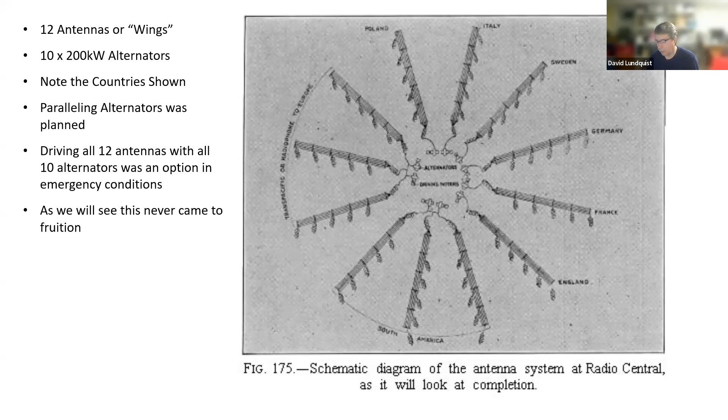So it's important to note, if you said who created what's at Rocky Point, it's really this guy, Ernst Frederick Werner Alexanderson. He's the guy who was chiefly responsible for the technology, how this was all put together at Rocky Point. This included the alternators, and by way of explaining, this was pre-large vacuum tube transmitters.

This wasn't spark gap. This was all AC alternator based, just a much higher frequency version of what generates our electrical power today, or the voltage in your car. But instead of 60 hertz or 120 hertz or 50 hertz, it was around 18 kilohertz. A very, very low frequency, just barely above the audible range. You'll see later in some of the logbooks, all the stuff was sub 20 kilohertz.

He holds several key patents on the technology. Guys like Tesla get a lot of credit for what they did. Alexanderson, if you look at total number of patents, is not far behind Tesla. And he was continuing to generate intellectual property up until the 60s. He did a lot of patenting on television, aircraft navigation systems, you name it. He's an extremely prolific inventor. As impressive as what he did at Rocky Point was, he was really just getting started during this era.

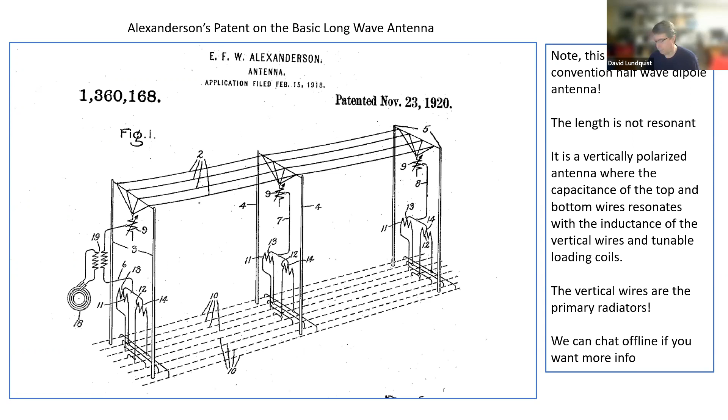Okay. All right, again, what I've got put together here was really more for a historical group. So there's some pretty heavy picture content. We'll go through some of the stuff. It's certainly of interest, and maybe there's technical elements as we go through.

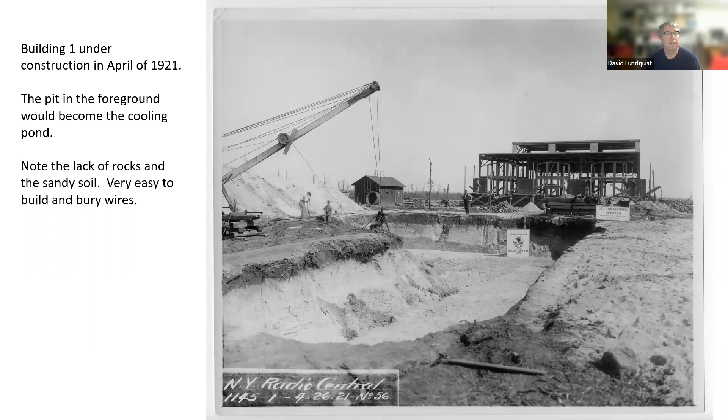This is shortly thereafter; they put dates on everything. You'll notice this is August 12th, '21. So the place was open 3 months later. So they got a lot of work done quickly. It's not the neatest construction site I've ever seen. There's a fair amount of stuff laying here. But even the cooling pond, you can see they did in sections. It got wider as time went on.

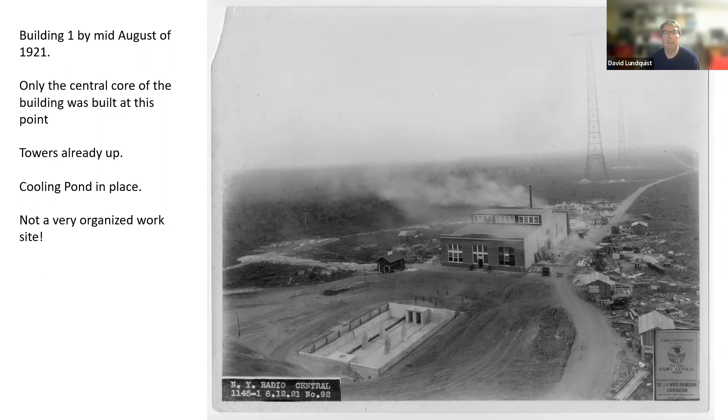But you can already see they've got some of the main towers up in the background. And again, there was a row out the back of the building. And this picture was taken from the first tower that led on the antenna wing out the front of the building. And in fact, the tower that this was taken from was the last one that came down in the 70s. So that one was up for a long time.

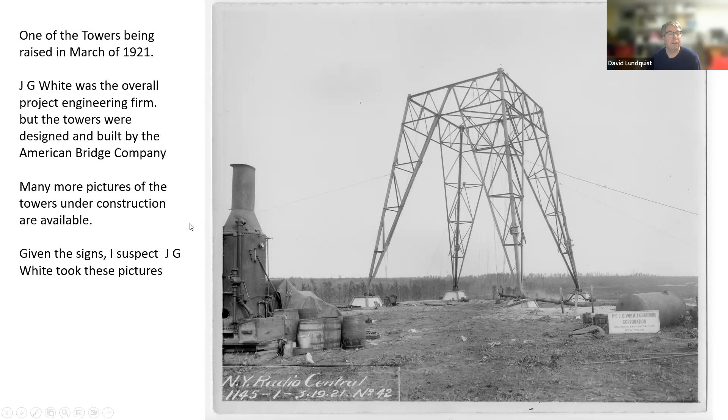This gives you some idea of the construction effort involved. The company that put up the towers, I think, was actually called the American Bridge Company. So this is what these guys did for a living. As you notice, he's got a real serious hard hat there going on, and there's little or no safety gear, no harnesses, no nothing. But not aware of any unfortunate incidents on site, but who knows?

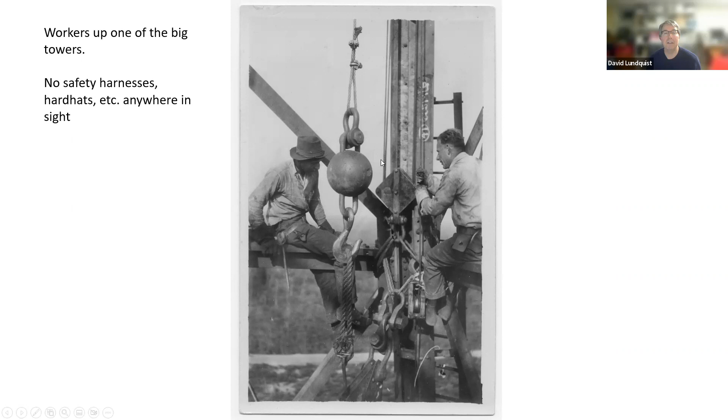This is interesting, and I think there's some more pictures of this. This is actually part of a gin pole, if you will, that they used to bring up pieces of the tower. They would anchor this at different levels and use cables and use it almost as a crane to lift up sections of the tower. And as I said, keep in mind the photographer had to get up here too.

I mentioned there's a lot of copper that went into the ground. From what I can see, given the structure of the antennas, for every piece of copper that was up in the air, there was a complementary piece of copper in the ground. And very likely all of it's still there. I don't know how deep they buried it. There was a piece of equipment I think I've got a picture of, which shows a pullable device, 4 wheels, pulled by a tractor, that cut what looks like about a 12-inch deep furrow in the ground and dropped the wire in. I guess copper wasn't terribly expensive at that point.

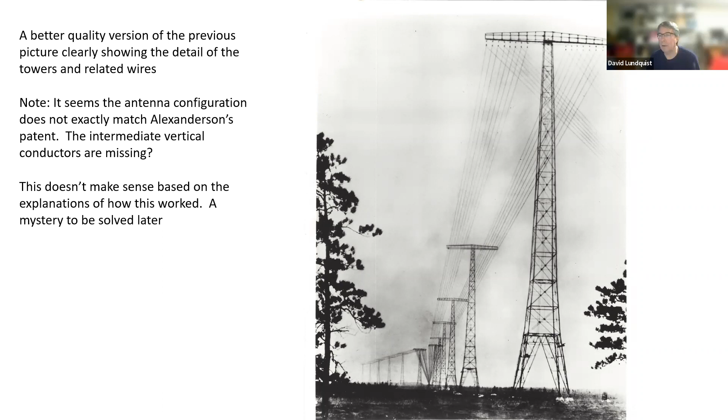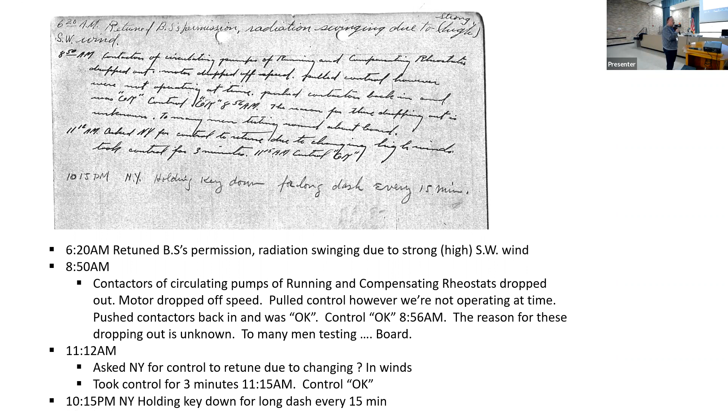Oh, comment? Yeah, Dave, do you hear us? Yes, we do. This is Levittown Hall. Question, I see you guys are transmitting from this station, but how do you know your intended recipient is getting the message? That's a great question. We'll get to that. Marvelous. Okay, we'll wait. Absolutely. So you can see some of the problems they had.

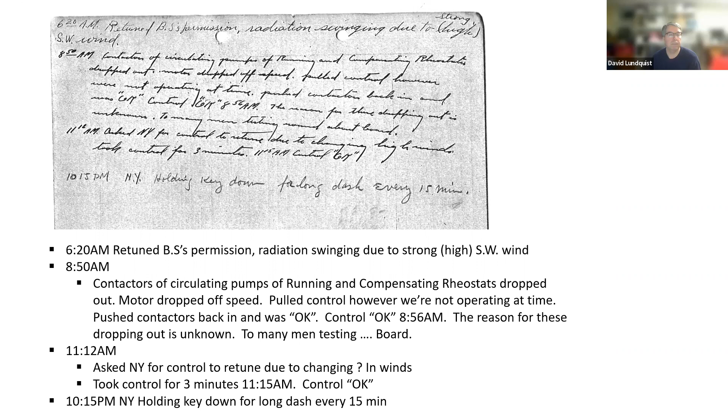You know, clearly it was a very finicky setup. I was a little surprised to see this. It seemed like it was extremely subject to weather conditions and wind and such. My assumption is just that the tuned Q of the overall antenna structure was pretty high, and that any wires swaying in the wind might have changed the effective capacitance or inductance and thus the tuning. So anyway, let's move on.

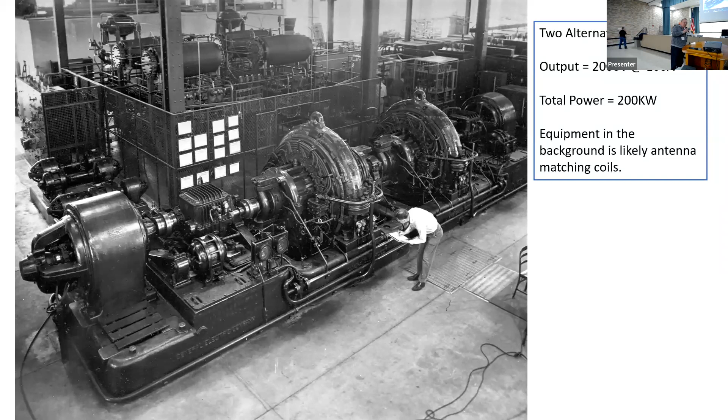I think through the use of what's called magnetic amplifiers, they were able to key it. Remember, the keying most of the time was not even on site. It came out on essentially telegraph lines from the city. So it's doable. They definitely did. I don't have anything at my fingertips, but I'm pretty sure they were at least in the 40 word per minute range. Keep in mind, this monstrous facility and all this infrastructure was basically to transmit one CW signal. So each one of those words was very precious when it came to dollar value.

I'll try to get more info. That's a good question, but I know they were. In fact, I think if you look at some of Alexanderson's patents, it talks about that. In fact, that might be some of the most interesting pieces of what he did, was how they managed to control the transfer of power. All right. Sorry, I don't have a crisp answer to that one.

But just getting back to where we were, you got the two alternators. And I think the feed goes straight maybe through this opening into all this tuning stuff here, which I would want to make sure nobody accidentally walked into. Hence the cages. I think these might be some of the pumps for the cooling and stuff, but pretty impressive arrangement. Okay.

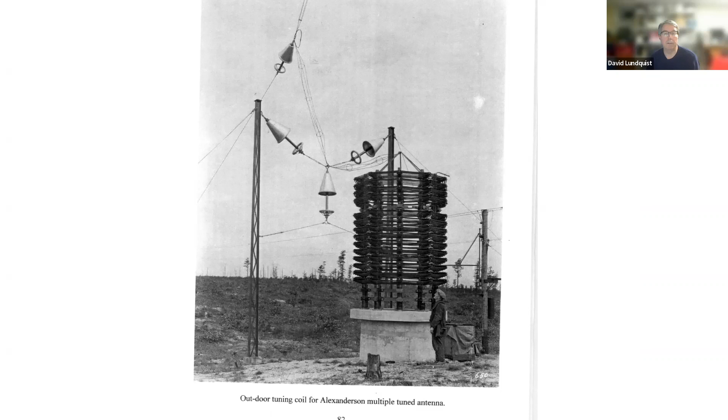And I put this in here because for many years at Rocky Point, I found these bases, and they're hollow with kind of a concrete shelf and a bunch of studs sticking out of them around the perimeter. I never could figure out what they were, because all that's left, of course, is the concrete base. But that's what it is. It's part of the matching and coupling network to go up to the antennas. But again, all that remains is the little bits of concrete.

It's just an interesting historical photo of this guy sitting here, I guess, doing his job. It's probably a pretty pleasant way to work out in the field. Gives you the idea what Eastern Long Island looked like back in those days, too.

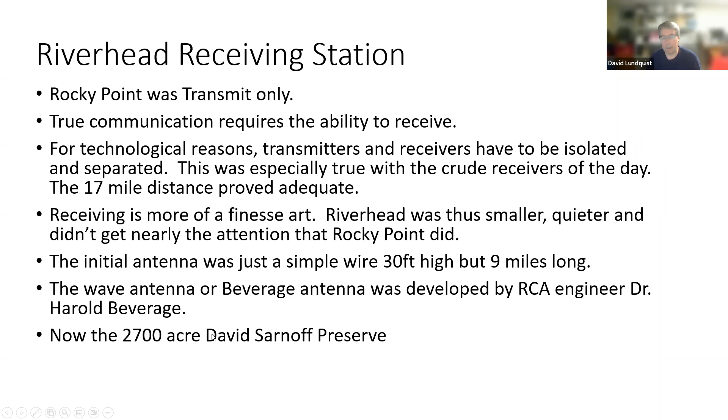So just like the main RCA site is now a New York State preserve, so is the Riverhead property. I think I've got some images of it here. Here's some interesting images of the first building that was put up at Riverhead. A little bit of a letdown from Rocky Point. Could be somebody's little Cape Cod style house. And it was just a room full of receivers. I think they were all just synchronously tuned, what's called tuned RF receivers.

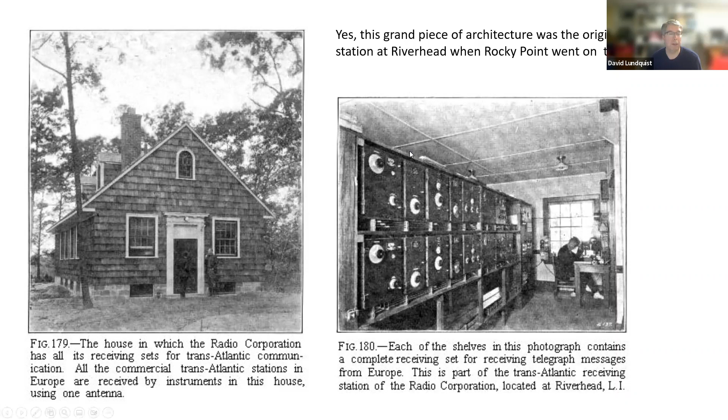I don't know a great deal about the details of how they did the receiving. This was clearly before Superhet, but again, we're talking about receiving signals that are already down in the near audible range. So you don't need a great deal of sophistication at those frequencies. Just a couple of nicely synchronously tuned LC filters and, I don't know what they used for diode detectors and so forth, and that would do the trick. But I'm sure it was stone quiet. You probably just heard some relays clicking away as the CW came in. Just a shot of some receiving equipment. Again, nothing super impressive, but very, very necessary.

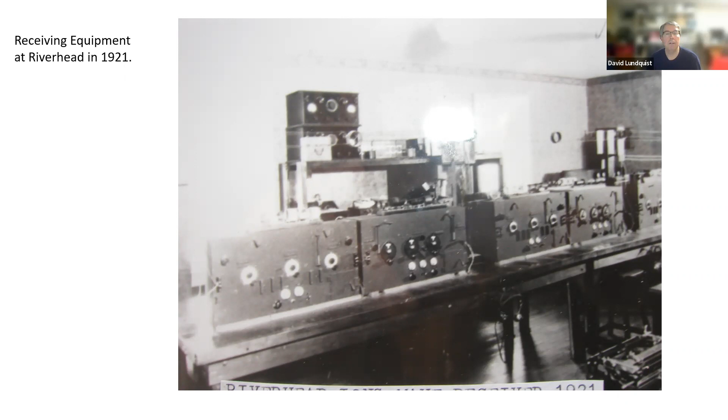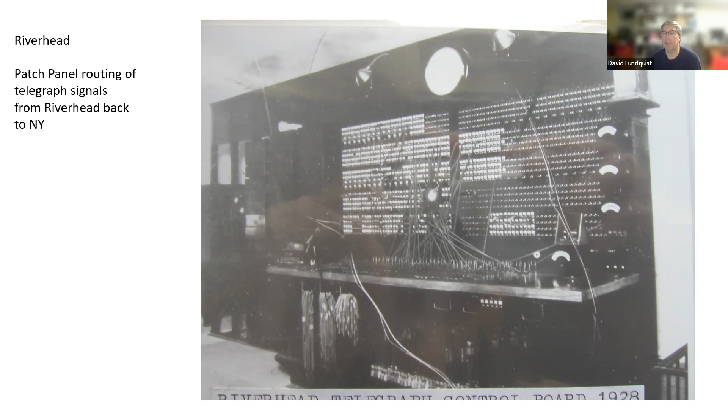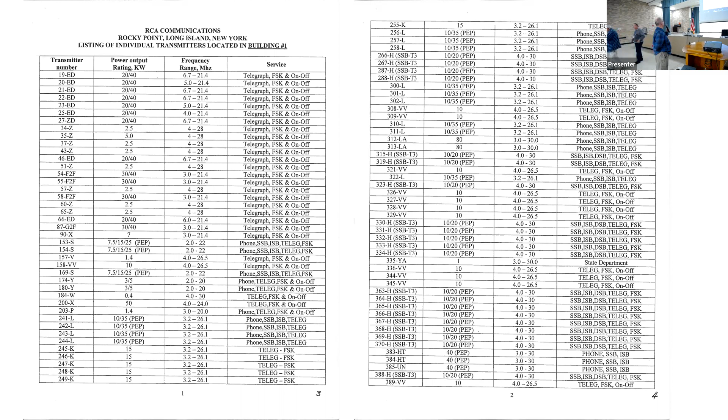Yep. When I went to work in '85, there was the RCA Mackay Marine Radio shack. They were tearing it down along with the telephone poles. Yeah. It was on Adams Avenue, and another street yet to be named, now Wireless Boulevard. Yeah. The interesting thing is, I don't want to segue too much, but I ended up working for a company in the Hauppauge Industrial Park called Coherent Communications.

As telex continued to evolve, even after it went terrestrial, there were two companies doing multiplexing equipment for telex. One was frequency division multiplexing. That was Coherent Communications, where they put 24 telex channels on a 4-wire voice circuit, spread out spectrally. Not unlike what we do today with PSK.

And then Databit, I don't know if you Long Islanders are maybe familiar with Databit. Databit was doing digital multiplexing. A single modem carrier with digital multiplexing of up to, I think it's the same 24 telex, 75 baud or 50 baud telex links. So I actually ended up developing and selling some telex modems later on.

But at this point in time, it was one telex channel per transmitter, except, I had to look this up, some of the stuff is labeled ISB, and that's independent sideband. That's a single transmitter that is simultaneously upper and lower sideband with different signals on the upper and lower sidebands. It's kind of a 2-channel multiplexer. But you can see there was a lot of RF floating around out there.

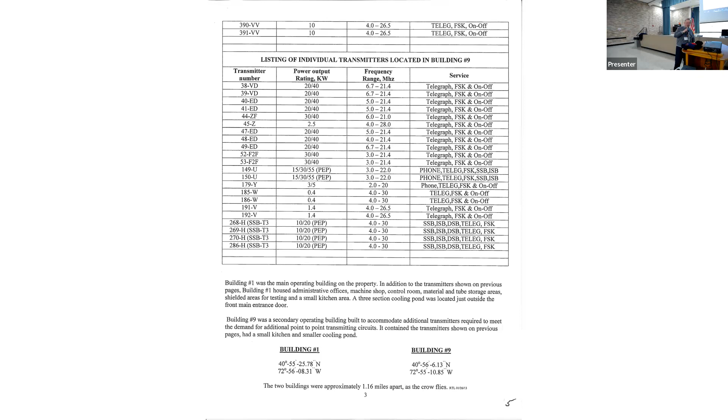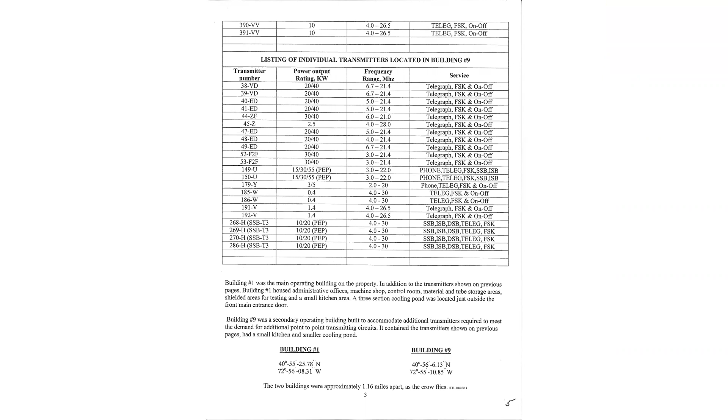It's really interesting, but this is sort of a sidebar discussion. You got me really interested. I'd love to explore that more. Yeah, exactly. Dave, if you could. Sure. Appreciate it, thank you much. Sorry, George, I don't mean to cut you off, but we gotta move along. Thanks. Shoot me an email. I'd love to have a private chat. I'd love to dig into that. I'm just Lundquist at IEEE.org. I'd love to dig into that a little further. Okay. All right. Thank you very much for your time. KD2FIU. Yeah, my pleasure also. Thank you. Thanks so much.

The antennas, by the way, I don't know if I've got too much information on this. Virtually all the HF stuff was using rhombic antennas. They're directional. You can't really easily rotate them. The big advantage they have is they're broadband. It's a traveling wave antenna. It's not a resonant antenna. And they tended to use nothing but rhombics.

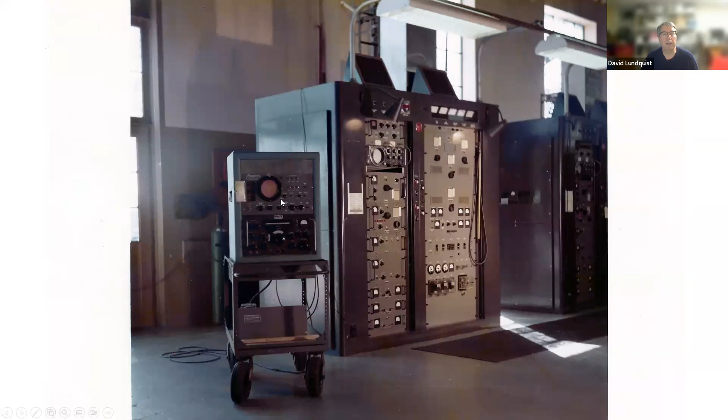This is one of the transmitters that was mentioned in that list. Now this, speaking of who did what, RCA did develop at their own facilities their own HF transmitters. So this was an RCA, I think a T3 transmitter, built, I won't say from scratch, but built for their own use. And they've got a receiver sitting there and I guess a spectrum analyzer just to make sure things are clean.

There's just some notes on some of the history of the area. I won't go into too much detail about this. There's an interesting shot. This was the control room upstairs at Rocky Point. As we noted earlier, everything came out from the city. So this was their equivalent to that earlier patch panel we saw at Riverhead.

These are the Model 15 teletypes. And they would periodically monitor traffic. Somebody said there's a problem, they'd tap in and listen. You got some receivers here, guys checking things. So there was always at least one person on site in that room, making sure everything was okay. This guy was named Lowell Fletcher. I met him. He was actually a PhD who just decided he'd rather work at Rocky Point than do anything else.

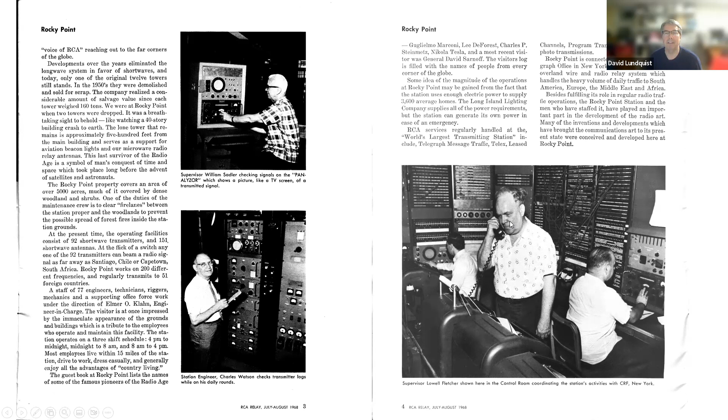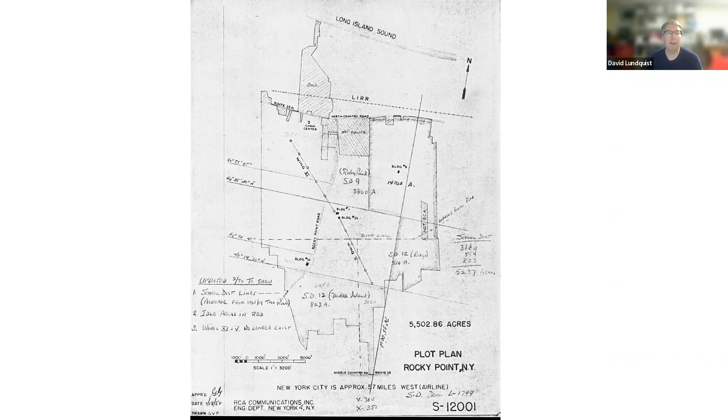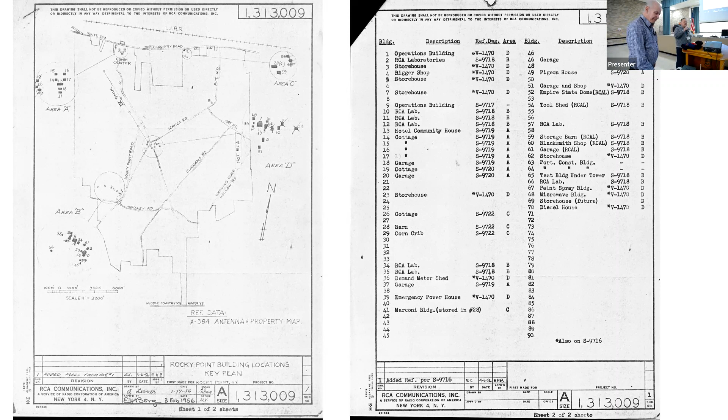Dave, just a quick question here. Was any ham radio activity done here at Rocky Point? Officially or unofficially? Unofficially would be the best word. Also, we're kind of approaching a time deadline here. Yeah, no, I'm good. I think we're just about done.

It was known that virtually everybody that worked there, like the technicians, they were almost all hams. Every single one of them. Now, what happens with an unused 20 kilowatt transmitter and a rhombic during off hours? They were doing, and I'm using air quotes here, testing. So yeah, that happened occasionally.

The big problem was the transmit receive problem. With that many transmitters running in the building at once, desense was horrendous. So you could get out amazingly well, but what do you do about receiving in a building with 30, 40, 50 20-kilowatt transmitters running? But yeah, it was known that they did, for sure.

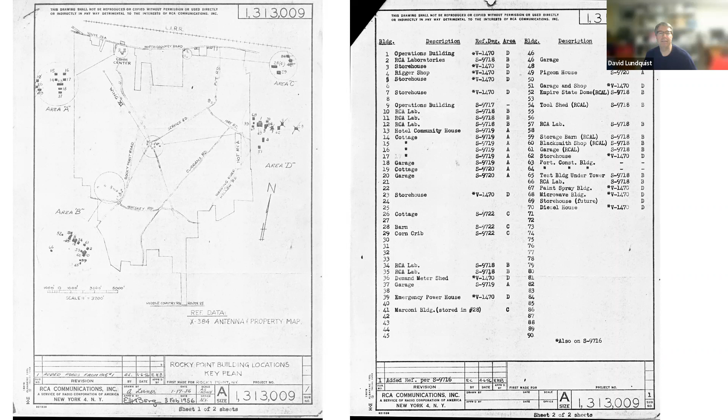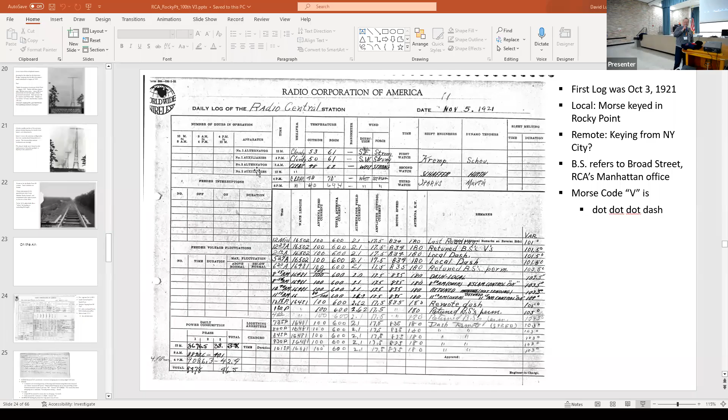We're out of time. I'll just mention there's a couple of videos on YouTube. Just search for RCA Rocky Point. There's a video of all the news feeds from the day the tower came down, and there are interviews with some of the guys, my father included, about operations there.